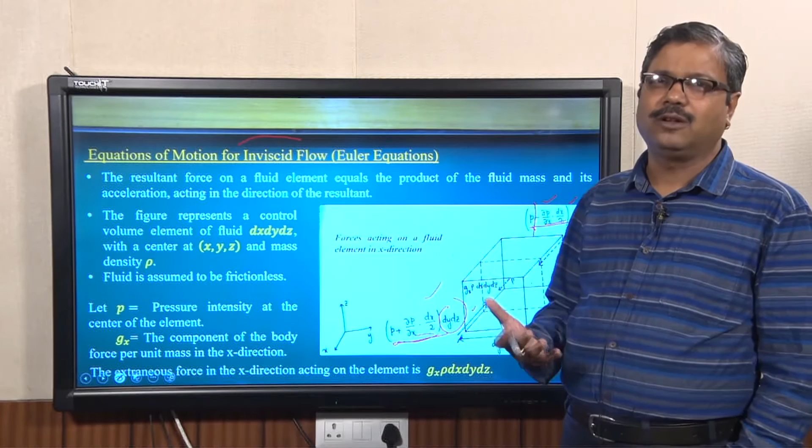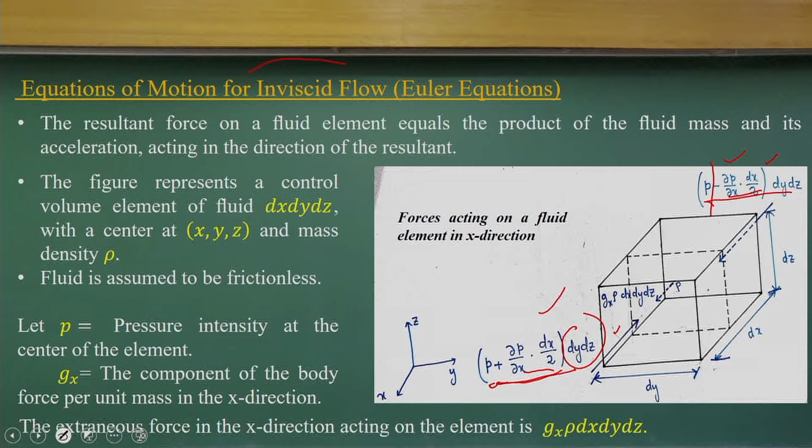Using Newton's second law of motion, the sum of forces acting is equal to mass into acceleration, which we know. So the same thing we have applied for this control volume, as it has pressure variability and velocity variations. Considering that control volume, we got these derivations. If you look at it, it's a very simple derivation: the pressure force equated with the gravity force components, that is equal to mass into acceleration.

That acceleration component has a local acceleration and a convective acceleration. More detail about local acceleration and convective acceleration you can follow in any fluid mechanics book. Fluid kinematics you can follow, to understand how interesting it is to know what is local acceleration and what is convective acceleration.

That is what is equal to the force due to pressure imbalance, per unit mass, that's why we have this term. Then you have the gravity force components.

Since it is three dimensional, three coordinate directions, we can write the same Newton's second law. So we can have three linear momentum equations, with the difference being the first one is for the x direction, then we have the y direction and the z direction. If you look at u, v, w, those are the changing variables, and the pressure gradient is in the x direction, y direction, z direction, with acceleration components in the x, y and z directions. It's simply force equals mass into acceleration at an infinitely small control volume, where we consider the pressure field and velocity field as continuous functions in terms of x, y, z and t, the space coordinates and the time coordinate.

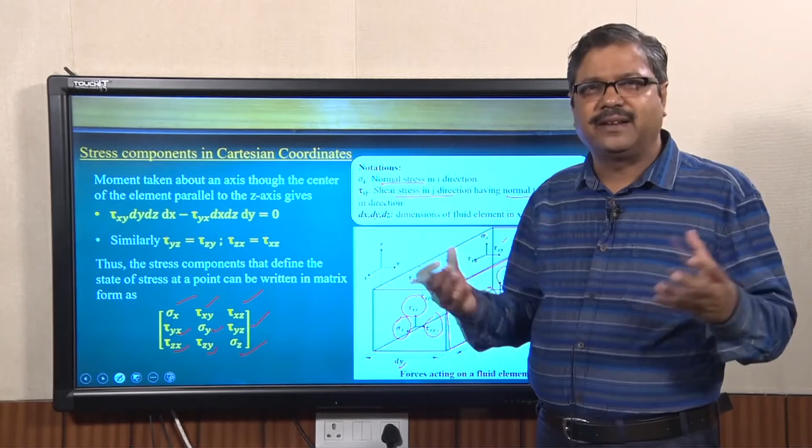So for any infinitely small control volume with dx, dy, dz, we can define the stress components on all 6 facets, all the 6 surface facets. This is valid for solid mechanics and for fluid mechanics. So for any small solid object, we can define a stress field like this, a stress tensor with 9 components.

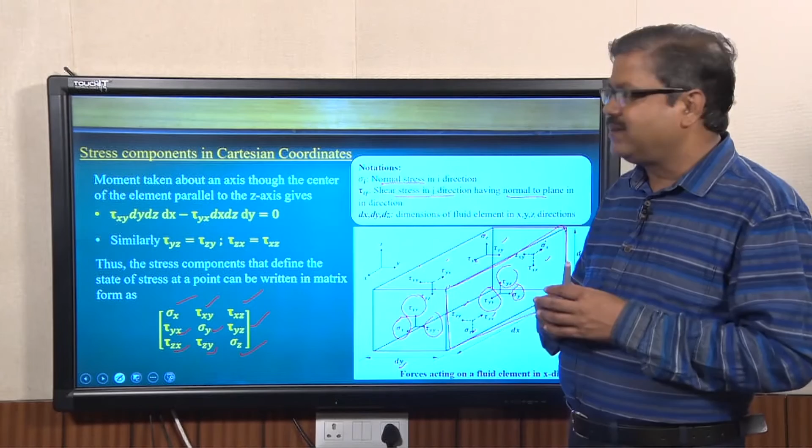But in some cases, if I take a moment about the axis through the center of the element, I can write this by equating the moment - force into area, into distance. If I equate this, I get tau xy equal to tau yx. Same concept applies to other facets: tau yz equal to tau zy, tau zx equal to tau xz.

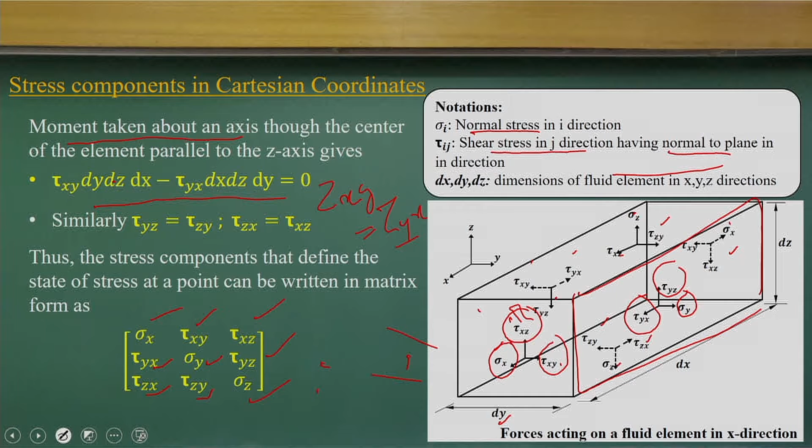So instead of 9 components of the shear stress matrix, we consider only 6, because the other 3 are equal to these. Tau xy equals tau yx, tau xz equals tau zx. So we have only 6 unknown stress components. That is the simplification we do for this infinitely small control volume.

Now, if you understand this concept, it becomes very easy to derive the Navier-Stokes equations, because we considered an infinitely small control volume and defined the stress field over it. The stress fields we defined in 6 components also have continuous functions within that, so we can follow the Taylor series approximation for different facets to find the value if we know it at the centroid.

For example, looking at this figure, I'm looking at the sigma x variation at dx by 2 distance on the surface. If sigma is known at the centroid of this infinitely small control volume, that value will be sigma plus the partial derivative times dx by 2 - that is the Taylor series approximation.

Exactly the same way as we did for u and v components, we apply the same approximation: sigma is a function varying in space and time, so knowing the centroid value, we can determine what the value will be at dx by 2 on the positive side or dx by 2 on the negative side. That means we can know what force components act in the x direction - some being normal stress components and some shear stress components.

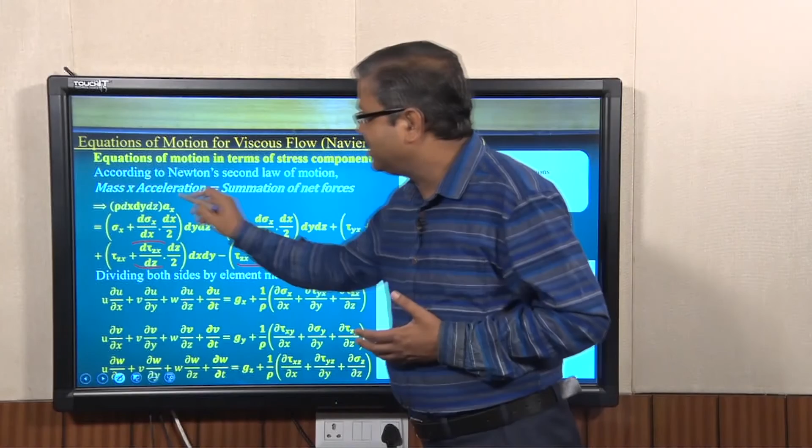That should be equal to mass into acceleration. Let me summarize what we have done. For the same small control volume, we are trying to write.

We are trying to apply Newton's second law for that control volume, where the stress distributions are considered, and from that stress distribution we try to find out what is the force acting along the x direction. That is what we are doing. That is what will give the mass into acceleration in the x direction. That is what we have done.

Simple things - the same Newton's second law of motion, nothing else, but applied for an infinitely small control volume with stress distributions representing the force acting on the surface and also the gravity force, as you know. So if you look at that, if I simplify these equations, I will get this result.

That means we are coming back to the equations which will have the local acceleration and convective acceleration terms. Then we have the terms in terms of sigma x, tau yx, tau zx along the x direction.

Same way, looking at these equations, you can write what could be the equations for the y direction and the z direction. It is a simple thing, just look at these equations and you can write it.

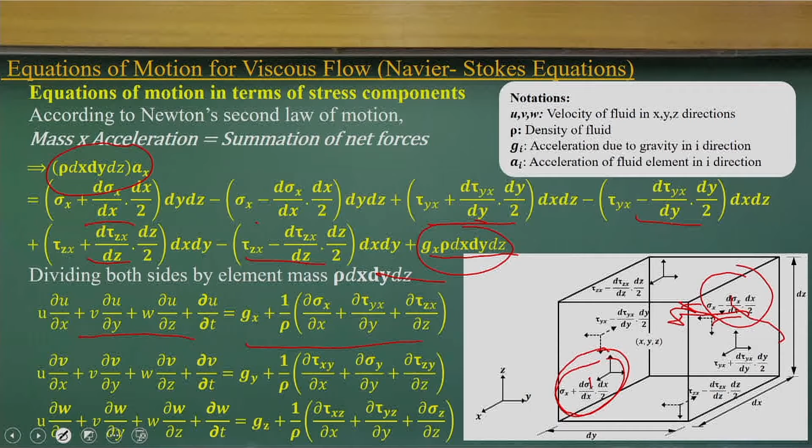If I try to write the equation of motion along the y axis, instead of u I can use v, instead of gx I will use gy, and similarly I can write the corresponding stress components. Once I write the y axis equations, I can write for the z axis because all are similar - only the scalar velocity field and the gx, gy, gz components and the stress components change.

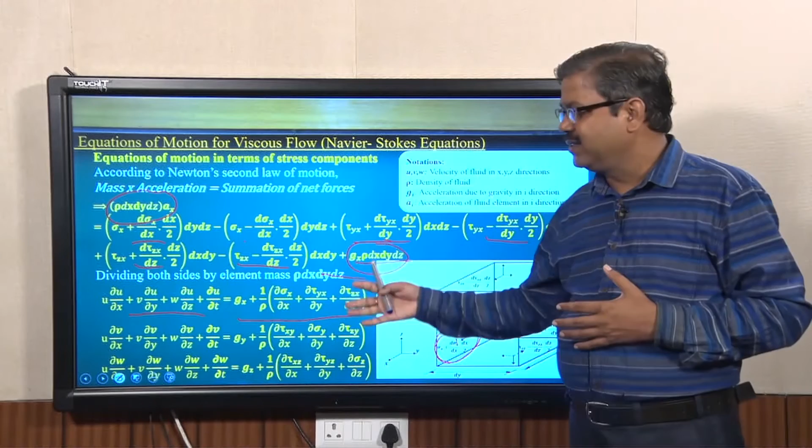So that is the basic concept - just apply Newton's second law into these smaller control volumes where we have defined the stress continuum, and on that basis we have derived these components. So try to understand this, and I'm encouraging you to write the equations yourself so that you can feel what is coming out of it.

Now, if you look at that, we have still written the equations of motion in terms of acceleration components and in terms of the stress component. We have not written it in terms of velocity gradients. So to reduce the number of dependent variables, we have to write the stress in terms of velocity gradient.

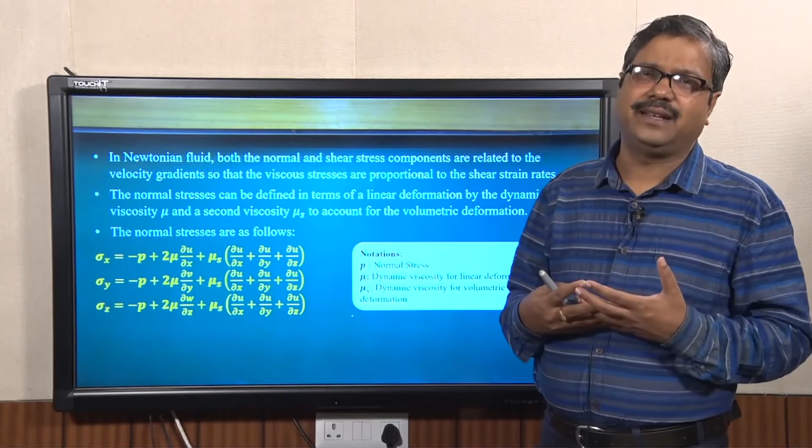As you know, from Newton's law of viscosity, the shear stress has a linear proportionality to the velocity gradient or the shear strain rate, for a Newtonian fluid. The fluid obeys that law.

So if you look at that part, that means I can derive the stress components I have in terms of velocity gradient, in terms of velocity gradient. That is what Newton's law of viscosity gives.

So if you look at that part, it's saying that the normal and shear stress components can be related to the velocity gradient. Viscous stresses are proportional to the shear strain rate, which is there in Newton's law of viscosity. Now what is the problem we have?

The problem is not a one dimensional problem. This is a three dimensional control volume we have considered. It will have two deformations - one is linear deformation, another is volumetric deformation. So we need to consider the stress due to linear deformation and the stress due to volumetric deformation.

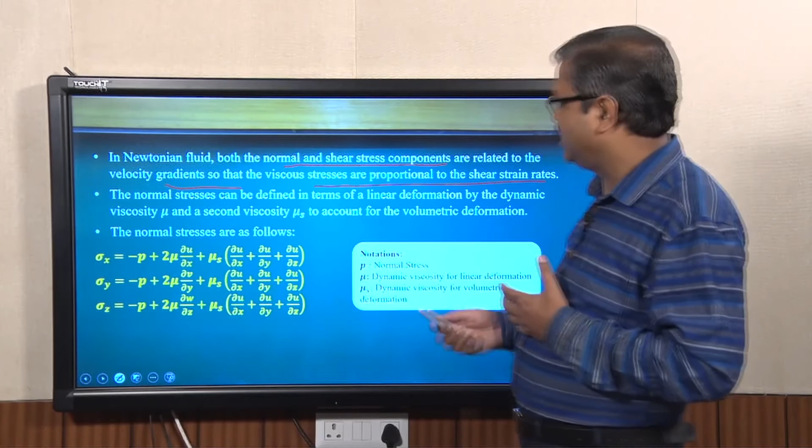That is what we consider - the linear deformation by the dynamic viscosity, and the second viscosity we just introduce. It is not a dynamic viscosity, it is another viscosity which considers the stress formed because of volumetric deformation.

Thus, any object when you have the stress field, it will go through linear deformations as well as volumetric deformations. Without going into more details, the normal stress in the x, y and z directions can be written in terms of pressure, velocity gradient, and volumetric deformations into mu s. Mu s stands for second viscosity.

Please go through an advanced fluid mechanics book to understand why we have the two factors, why we have a plus and minus, but try to have a visualization.

Now I can derive the normal stress in the x direction as a function of p, the pressure, the velocity gradient representing the linear deformations, and the volumetric deformations. That is what I can write. Same way I can write for sigma x, sigma y and sigma z.

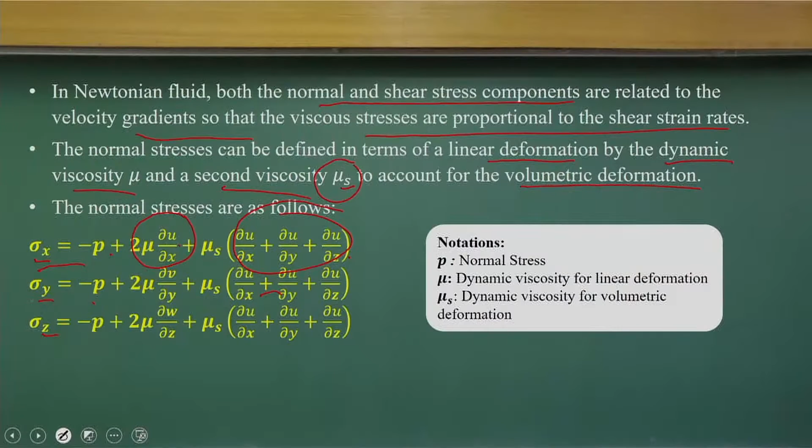So the normal stress components we have written in terms of p, in terms of velocity gradient, with proportionality constants: mu is the dynamic viscosity and mu s is the second viscosity, which takes care of volumetric deformations, the stress generated due to the volumetric deformations.

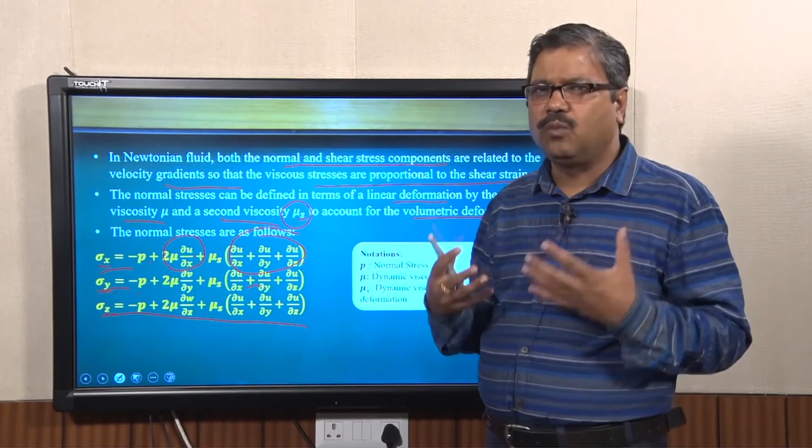If we consider that and go to the next level, looking at what could happen to the shear stress component, any fluid kinematics chapter will show we can easily write the shear stress component in terms of the velocity gradient, with mu standing for dynamic viscosity. So we can write it.

Then the Stokes hypothesis says that the second viscosity effect is small, not significant because of volumetric deformations, so it will not be that significant. We can approximate it as minus 2 mu by 3. Similarly, the pressure we can quantify as the average normal stress, and the negative sign indicates it acts in the opposite direction of the stress field.

So if you look at it that way, you have sigma x, sigma y, sigma z, and one third of that, meaning you are summing up and averaging to compute what p will be. Just to look at it, if my infinitely small control volume dx dy dz tends to zero, the average normal stress equals the pressure, and to account for direction we have introduced the minus sign.

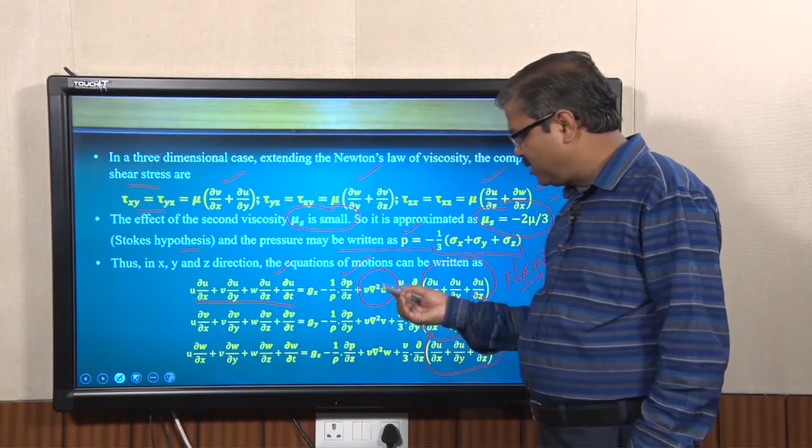In the Euler equations we have an acceleration component, a gravity force component, and a force per unit volume due to pressure imbalance, but now we have introduced the viscous effect. That is what we need to understand.

This is what we have considered as the viscous effect, the Laplacian of u, and this part is the volumetric part. So if you try to understand, this is the part we have introduced in the Navier-Stokes equations as additional components to the Euler equations. As we consider the fluid has viscosity, and that frictional effect as linear deformations and volumetric deformations, we arrive at these additional components.

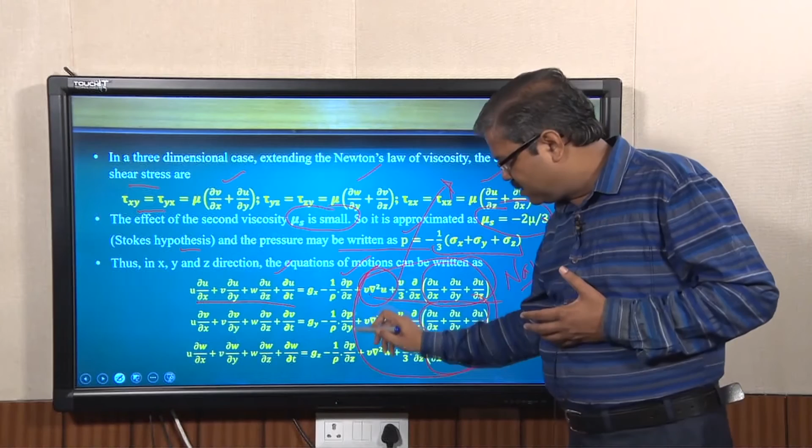Without going into all the detailed computational fluid dynamics discussion about these equations, let me summarize. What we are getting is a nonlinear partial differential equation with nonlinear components like the Laplace second order components, and other components. So, the more complicated equations we get are nonlinear partial differential equations to solve fluid flow problems considering viscous effects.

Here we have 4 dependent variables: velocity components u, v, w, and pressure. But we have 4 equations: 3 linear momentum equations and 1 continuity equation.

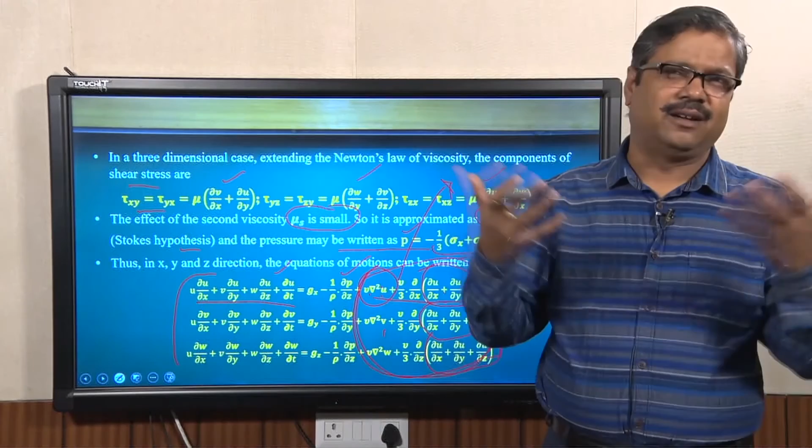Considering that, we can solve it, and today it is possible to solve it. There are a lot of Navier-Stokes equation solvers available commercially or from other sources nowadays. That is not a big issue to solve these equations.

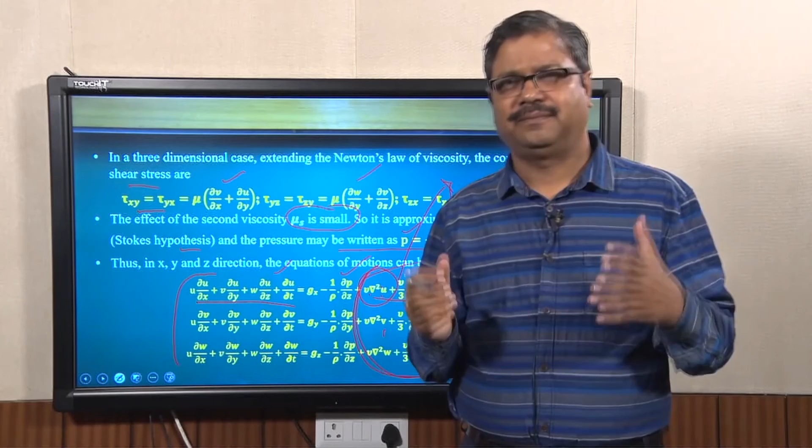But it looks a very complicated equation in terms of being a nonlinear partial differential equation with 4 dependent variables u, v, w, and p, and 4 independent variables, the space coordinates x, y, z, and time. So, how do we solve these things? I am not going to explain much now.

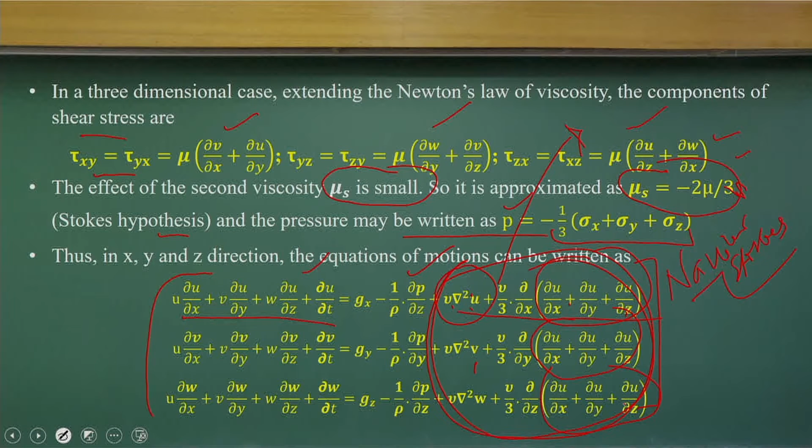Let us come back and solve these equations using an example problem. This example is considered from the FM White textbook, just to demonstrate that we can use these equations to get analytical solutions for fluid flow problems.

Let us consider incompressible flow, where density does not vary with time, and the velocity field is given. If you look at this velocity field, you can interpret many things: it does not have time components, it has only x and y components, there is no z component, and the w part is equal to 0.

We have to consider this before solving the problem, because when trying to get analytical solutions, you need to understand what type of velocity field and density field is given to us. Density being incompressible means density doesn't vary. Considering that, we have to determine under what conditions we are looking for solutions to the Navier-Stokes momentum equations.

If this is the velocity field, what is the pressure field we are looking at, or does this velocity field satisfy the Navier-Stokes equations? That is what we are looking at.

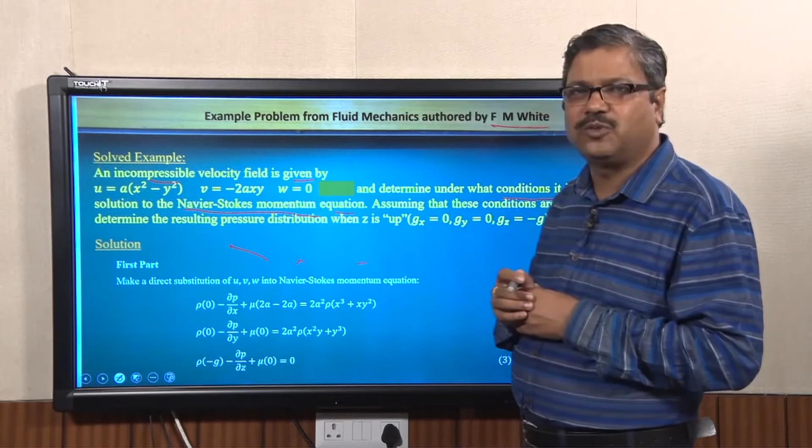So what we do is apply the Navier-Stokes equations and substitute all the terms. We compute this in the Navier-Stokes equations for the x, y, and z directions, substituting all these things: first partial derivative, second partial derivative with respect to x, then with respect to y.

Then we substitute these values and try to find out what these three equations will be. If you look at these three equations, you can find that this equation is very simple because we can integrate it directly, since it does not have any extra component. So we can integrate this to get it.

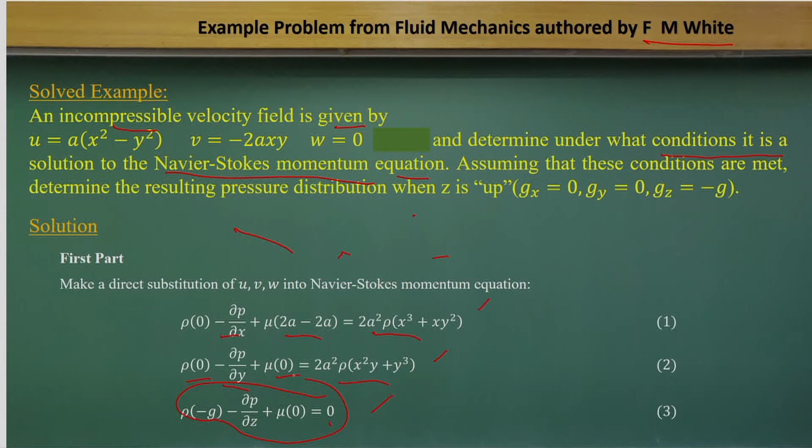So if you integrate it, you can see this pressure is varying like this, but there is a constant which may be a function of x and y that we do not know yet. Second, we integrated one equation to get a probable solution with an unknown function f1(x, y).

Is it the correct one? So what do we do? We use the equations to check the other two equations, to see if they are satisfied. We differentiate the equation with respect to y, and with respect to x, then compare it, and we found these are also the same values. That means the given velocity field satisfies the Navier-Stokes equations.

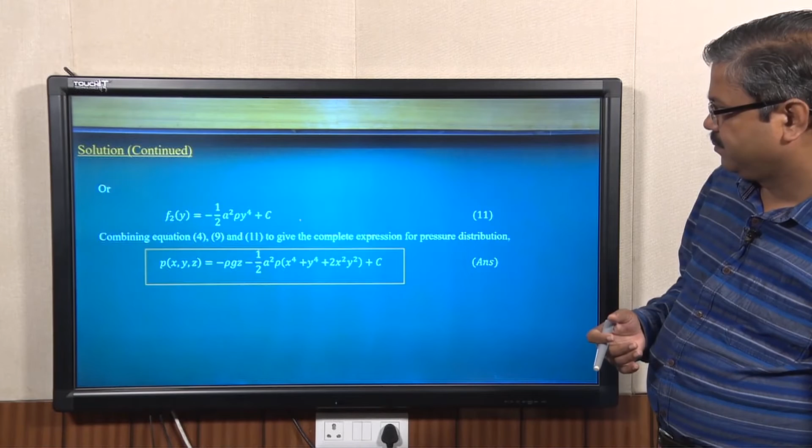Now we are looking at what could be the pressure field. Again, this is all just differentiation and integration to find out what the integration constant values will be.

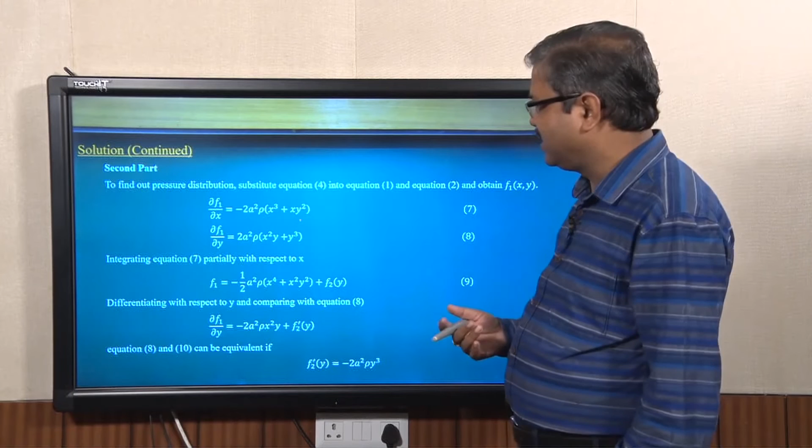That is the reason we substitute equation 4 into equation 1 and equation 2 to obtain f1(x,y). Once we know f1(x), we integrate it and differentiate to get the value of f2. Now we substitute it, which gives us the pressure field.

This part we got after integration and differentiation of the previous equations, and that is what gives us the pressure field which satisfies the velocity field - the pressure field for the flow domain where the Navier-Stokes equations hold good.

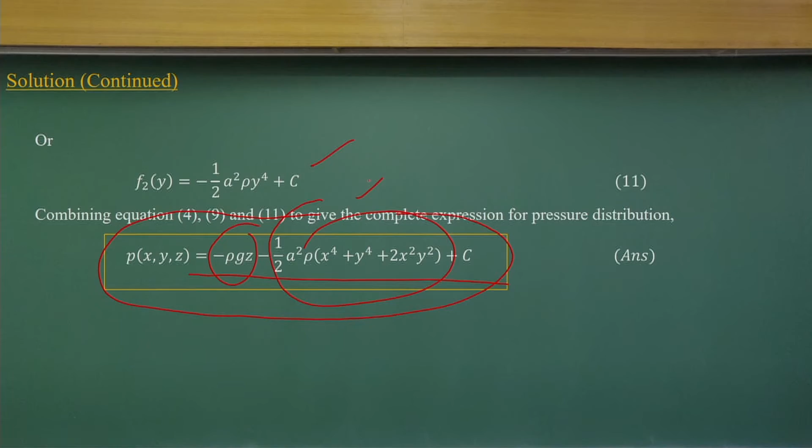Before completing these things, I want to show you that in a similar way we have applied the Navier-Stokes equations for fluid flow problems in channels. We know that many times we put small obstructions like porcupine structures, river training works, and try to find out how much they work in terms of velocity reduction.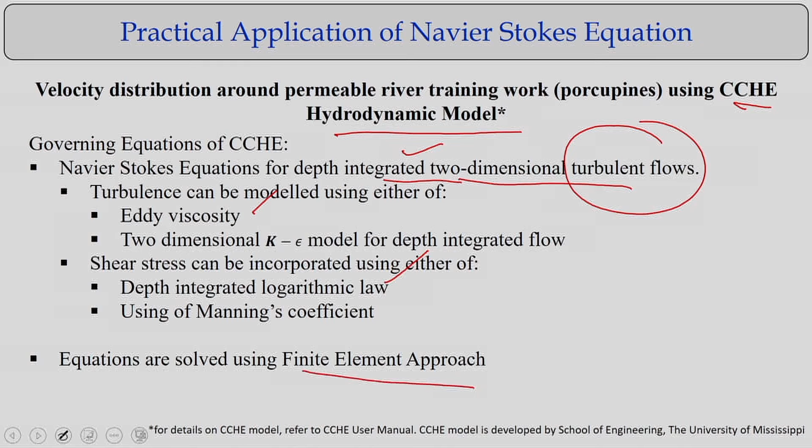That is what we try to do with 3-dimensional models. This is a 2-dimensional model which has the Navier-Stokes equations with depth integrated. The turbulent flow will have an eddy viscosity, K-epsilon model, and depth integrated logarithm laws, solved using a finite element approach.

That solution gives confidence that we have put the structures here and tried to measure the velocity using numerical models. If you look at these velocity distributions, this is the velocity distribution measured from flume experiments. You can see there is a velocity reduction because of these obstructions. This is clearly visible in both the upstream and downstream velocity distributions.

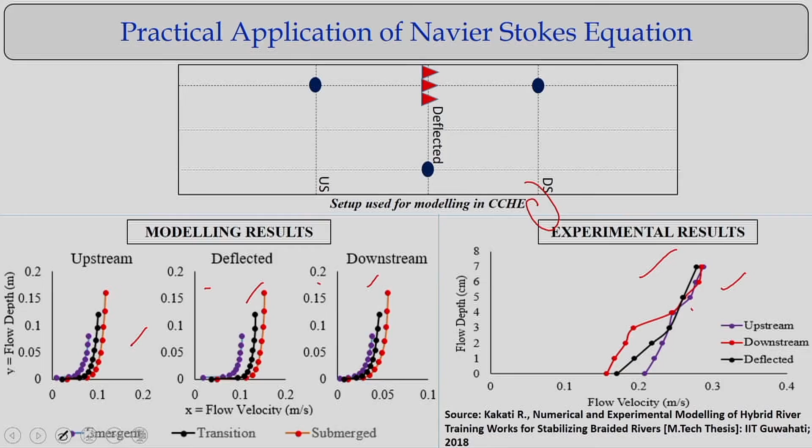There are significant velocity reductions happening in experimental data as well as numerical modeling of the Navier-Stokes equations. So now it is possible to have models available which solve the Navier-Stokes equations with some approximations, like the depth integrated concept with turbulent structures. We can get solutions like what we have done for river training work with porcupine structures and small obstructions, and see how much velocity reduction is happening, both numerically and at the experimental level.

So those things we can conduct, and nowadays it is possible to consider Navier-Stokes equation solvers. Let us come back to derive the momentum equations for river flow, unsteady gradually varied flow.

Consider the variations in the gradually varied as well as unsteady flow. If you look at a river as considered here, this is the bed, this is the free surface, and there will be the energy gradient line, and the hydraulic gradient line. If I consider this channel making an angle theta, the river is making angle theta with the free surface and the energy gradient line. The slope of the energy gradient line we define as SF, and the slope of the bed we define as S naught, which is equal to tan theta.

But the geometry of the cross section of rivers can be complex, as we consider an area integrated concept. It can look like this, with the free surface here, and ZC is the centroid point where pressure acts. In this field, pressure has variations, and the area A also varies. So P into A also has variability. Pressure into area is the force, which we also consider as variable along the x direction, so along the x direction, pressure into area varies.

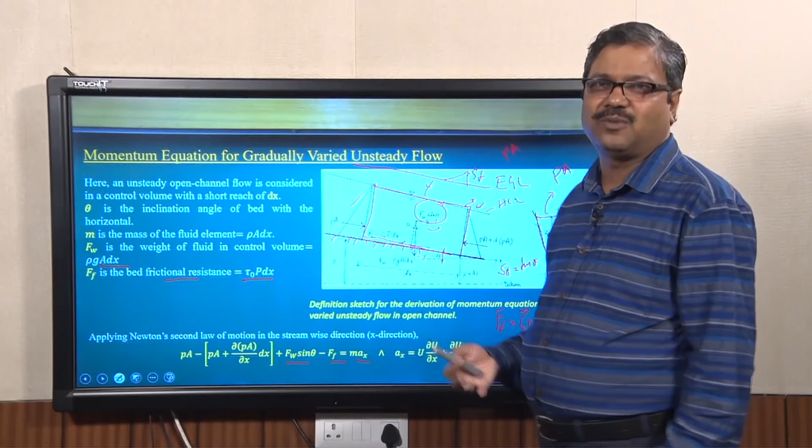Like at the free surface there is no force component, we have considered this hydrostatic pressure as PA, which is a variability we have considered, and we find out the frictional resistance force and all. That is, the sum of the forces is equal to mass into acceleration.

That is the component, and the acceleration we can define as, in this one direction, the area average u value. That is what we can define as local acceleration and convective acceleration in the x direction. So we have a one dimensional equation.

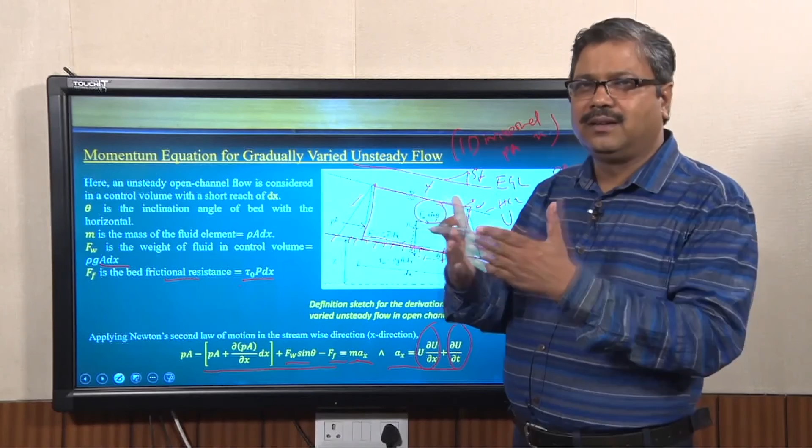In the x direction, try to conceptualize that we have considered the river and we are just looking at the longitudinal direction, what is happening. We are not considering much of the lateral direction or depth variations. We are just looking along the longitudinal direction, how these force components are there.

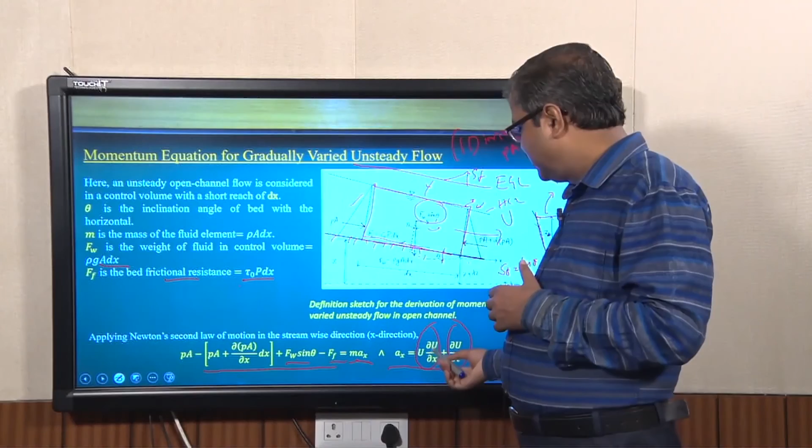That is the area average velocity we have. We are looking at the local acceleration, and we are looking at the convective acceleration terms.

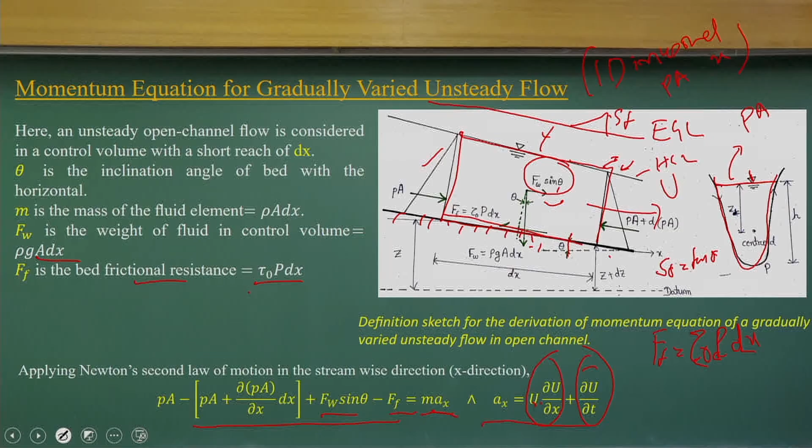Now we have to simplify these equation components. If you look at this part, we get these components, the gravity force components, and the bed shear force components, then the acceleration components. Just rearranging these equations and dividing by the weight of the fluid, I get these equations.

In these equations, if you look at that, it's quite interesting to know this value. We know S naught is the bed slope, SF is the friction slope, we have a local acceleration component and a convective acceleration component, and we can define the bed shear stress in terms of friction slope. In any open channel book you can find, with a small control volume, the relationship between bed shear stress and friction slope.

If I try to find out these values with the approximation of hydrostatic pressure distribution, this component I will finally get as equal to del H by del X. That is why it is a quite interesting approximation, where we have considered a hydrostatic pressure distribution.

Since it is a hydrostatic pressure distribution, we can compute the pressure at the centroid of this area, and if you simplify it, finally we get this component as nothing else but the gradient of the flow depth. H stands here for the flow depth, gradient of the flow depth. That is what will give us this component: the bed slope, friction slope, local acceleration, and convective acceleration components.

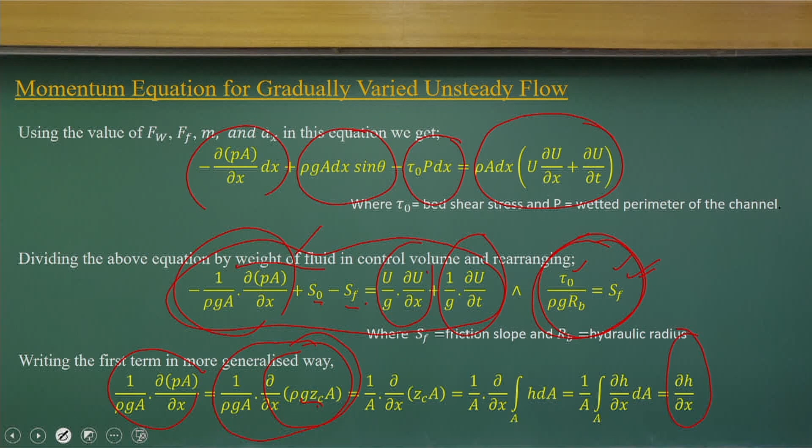Now if I substitute all these things, I get this equation which is known as the Saint-Venant equation. And this is, you know, related to Manning's equation. More detail about the Saint-Venant equation we are going to discuss in the next class.

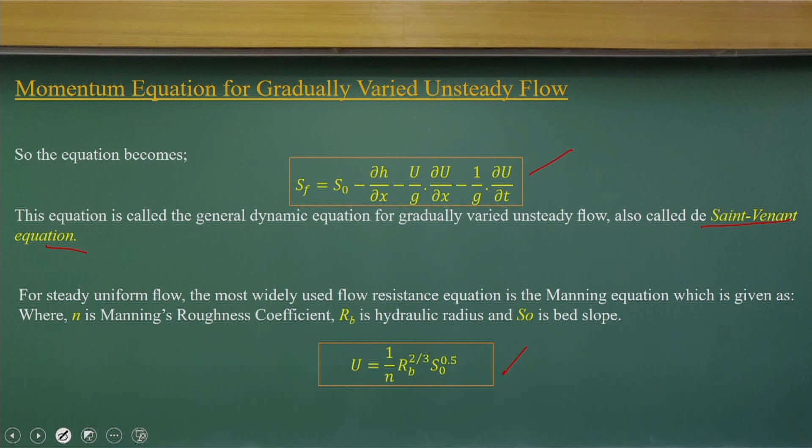Just to conclude this part, I want to say that we definitely do a lot of things to try to understand rivers, but try to understand this quote: a good river is nature's life work in song. So just try to understand what we mean by rivers. We try to frame rivers in mathematical forms, but still our knowledge is limited for natural rivers. With this, let me conclude this lecture.